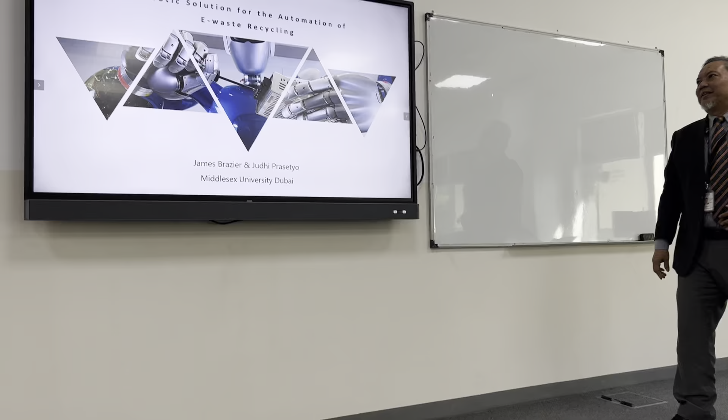So it seems that another presenter presented earlier, so I have to present last.

I'm presenting on behalf of James, who is a recent graduate of MSc Robotics. He couldn't be here. He's working as operation director for a manufacturing company in Dubai, but his interest is in robotics, just like my other students and graduates. They already have MBAs, but they take MSc Robotics anyway. So thank you for joining us.

All right, so the challenge here is that we have more than 57 million metric tons of e-waste in 2021 alone. And that's about as heavy or even more than the Great Wall of China. It's very big, right? And it doesn't stop there. By 2030, we will have 30 billion IoT devices. This morning we heard the keynote speakers talk about IoT devices, not only your phones, but all of these connected things, all these electronics will contribute to this landfill.

So why do we have so much e-waste? Well, first is because there's rapid R&D. When was the last time you upgraded your phone? It's probably less than 3 years ago, right? It's very rapid compared to before, when our devices could last for 5 years, 10 years. Now it's very, very quick.

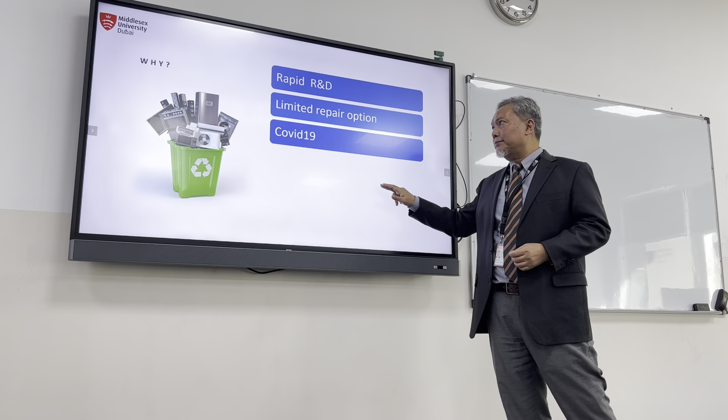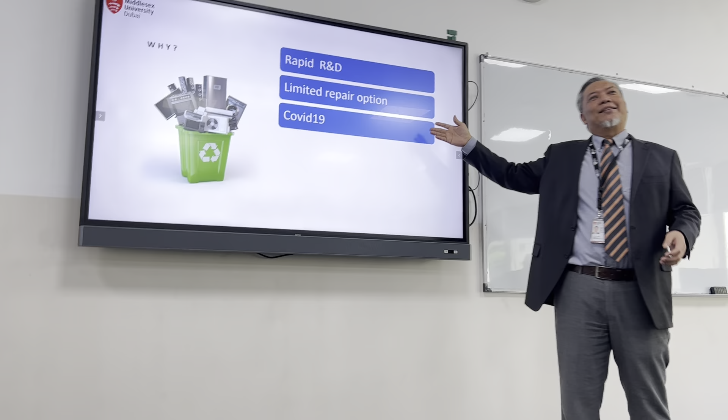And then COVID-19. Can you guess why COVID-19 is accelerating the pileup of e-waste? Because during the pandemic, we have online learning, we have work from home, right? So naturally, you need more devices. You want to upgrade your internet speed. Maybe you were happy with 100 Mbps, now you want half a GB or 1 GB, right? Maybe you used to have a 3G phone and were very happy, then suddenly you want 4G, 5G. So these things accelerate the number of electronics that we acquire, hence more e-waste.

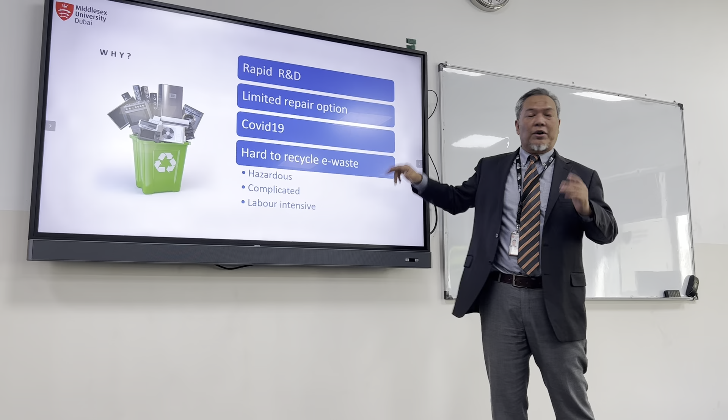Another thing is e-waste is really hard to recycle. While all these three things are beyond our control, what we are trying to focus on here is how to recycle e-waste, and how hard it actually is. Well, first it's hazardous because it probably contains batteries. Batteries contain mercury. Some e-waste can emit gases that are dangerous for us.

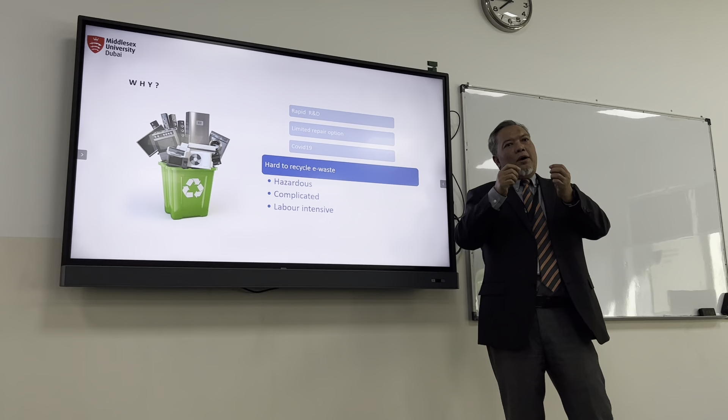It's complicated because most of them consist of small parts, small devices. You have to tear them apart and then you have to separate them. You have to put plastics over here, metal over here, and other things. Maybe some of them are recyclable, some of them are not, right? So it's very labor intensive. It has to be done by humans.

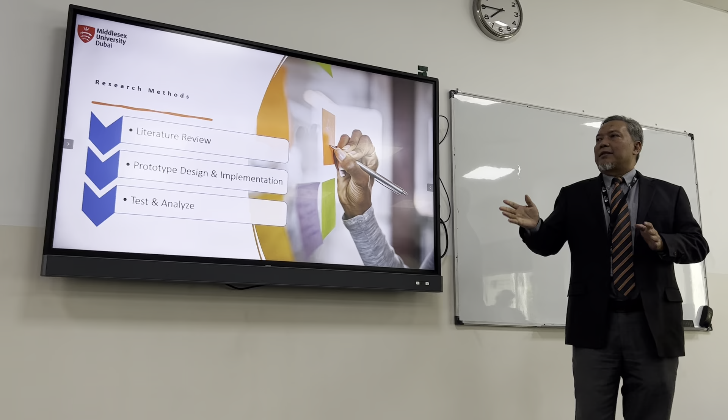That gets us thinking, how well can a robot help automate this process? Will a robot help us or not? If so, how well? So we did the research. Actually, this was James' final year project in MSc Robotics, and then we did further research on this.

We started with the literature review. We found that yes, there are many attempts at using robots for automating e-waste. So we started to do prototype design and implementation, and then test and analyze. During the literature review, we found that most failed attempts are because the robot cannot locate where the component is. It goes to the wrong things and then it stops the sequence.

Another hard thing to do with robotics is to have a generalized approach. Just like a human, if I give you radio model A, you will be able to tear it apart, and next time I give you another model, you will be able to tear it apart. A robot doesn't work that way. That's what the literature claims, but we have yet to prove that.

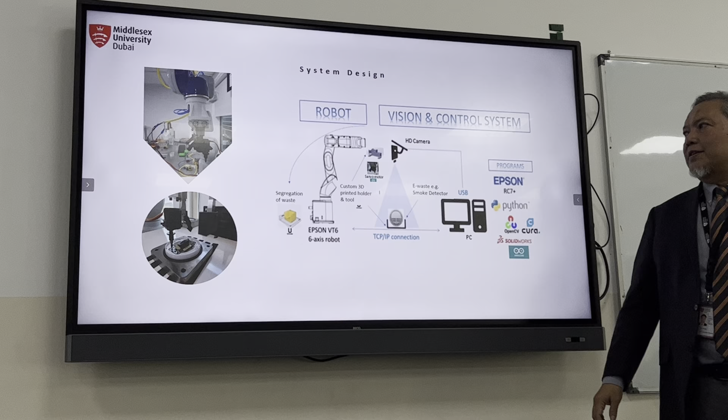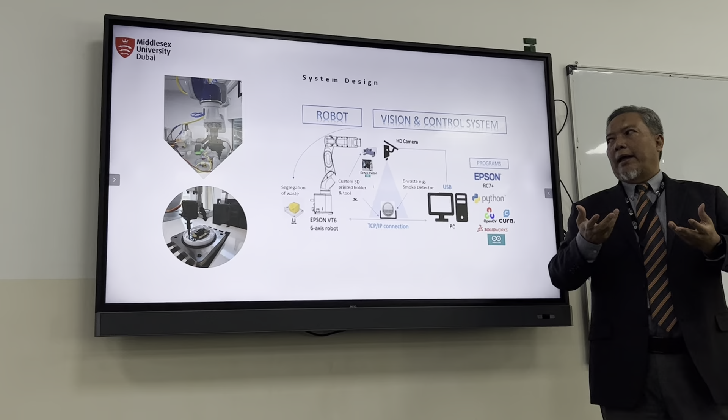So we built a system like this. We have an industrial robot in the lab. It's an Epson VT6 6-axis robot, and we equipped it with a full HD camera, and we picked an e-waste item as an example to be disassembled, and we will measure how much time it takes and how accurate it is.

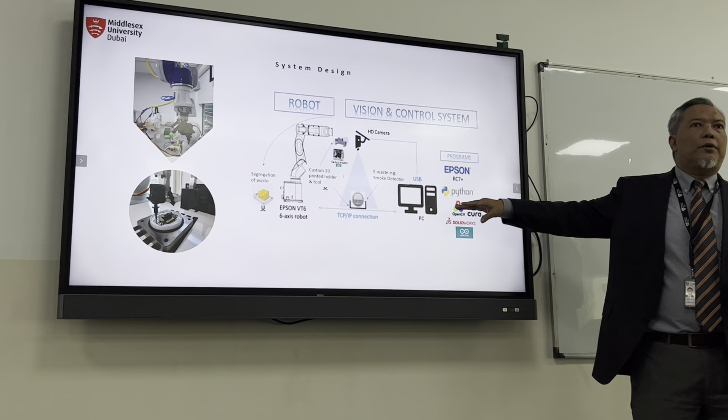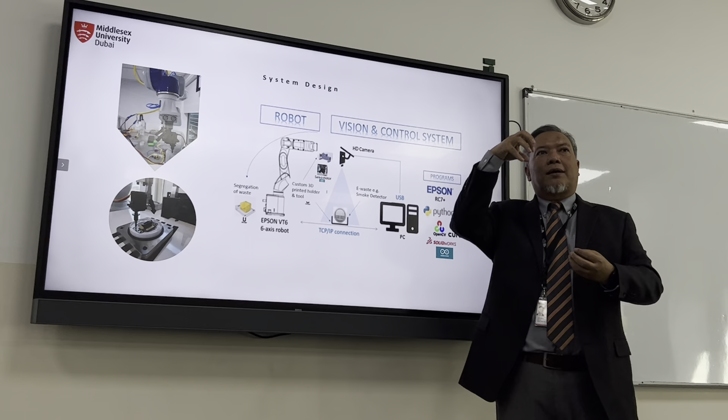And we take a smoke detector as a test subject, connected to a computer using Python and OpenCV, and we have to design a custom gripper to handle this e-waste. The custom gripper needs to have a screwdriver also there. We fit in a motor there.

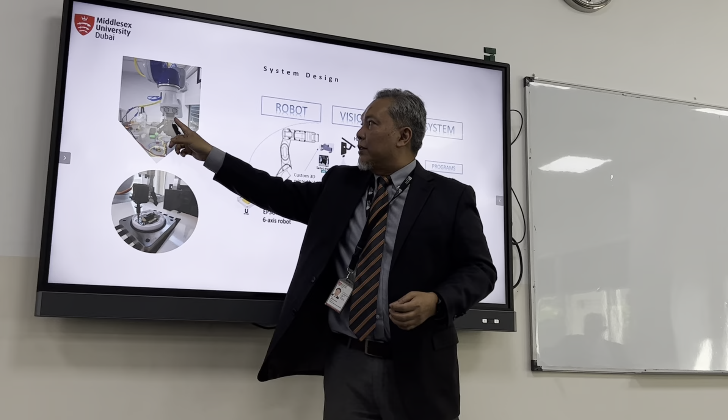So we have to design the gripper using SolidWorks and Cura, and we attach it on the robot's arm as the end-of-arm tool over there. Yeah, so it can open a screw because it has a screwdriver. It has claws that will pick the item and place it where it should be.

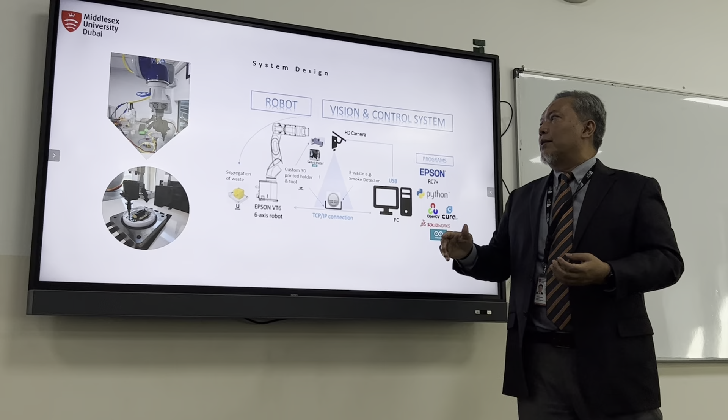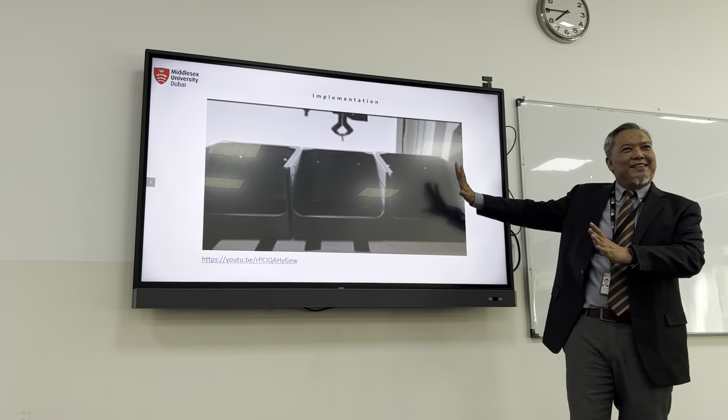So with this, we did the implementation, and let's watch. Does it work? Okay. So basically, what the video shows, it's a robot. Oh, okay, there it is. Okay. Let's take a look.

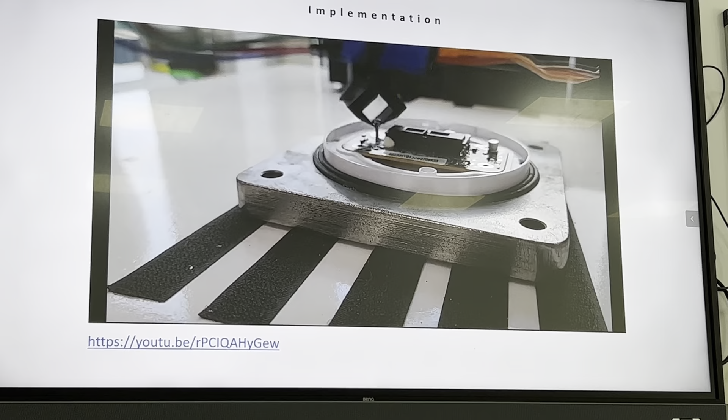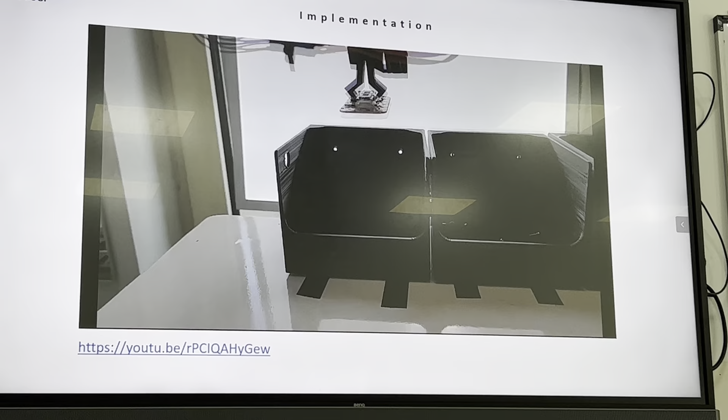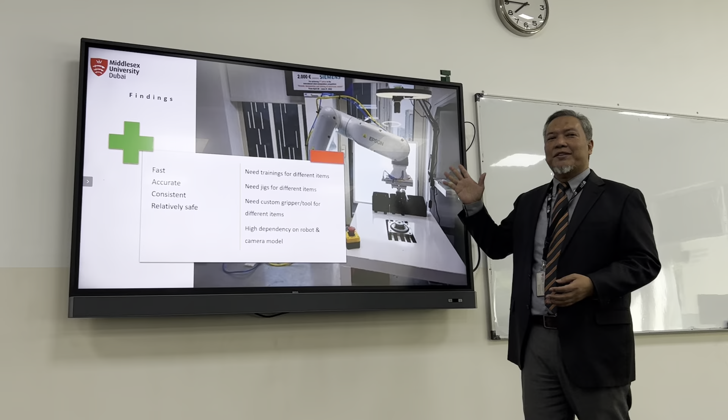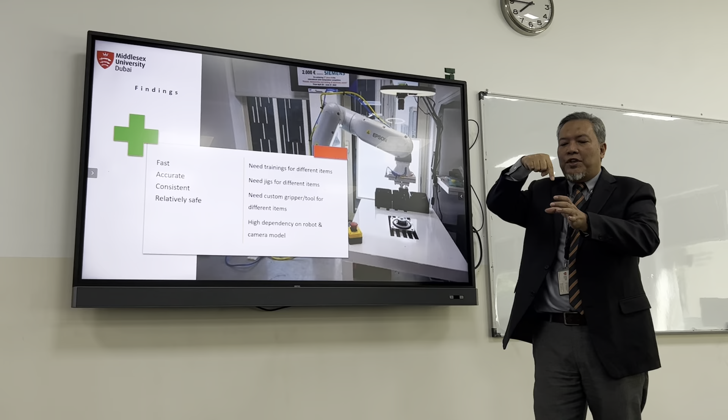Alright, so as you can see, the robot performs very well. And on the other hand, we also see that there are some issues that we have not been able to solve. So for example, it's fast, yes, it is accurate. And its accuracy is amazing because we don't have to place the e-waste in a certain way so the screw is always there, because there's a camera that, even if you put it like this, will know where the screw is, so the screwdriver will go exactly where it is.

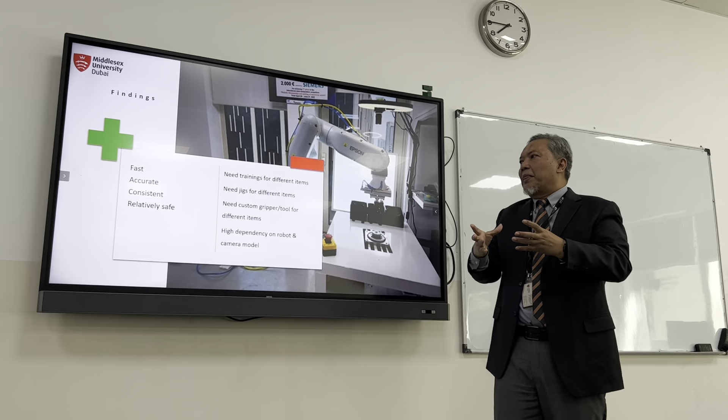It's pretty accurate. However, if you take another model of a smoke detector or other e-waste and you put it over there, you will have a problem. For example, you need another training because maybe it was plastic over here, but in another model it's metal. So after you pick it up, you have to put it in the place where it should be for metal, not for plastic.

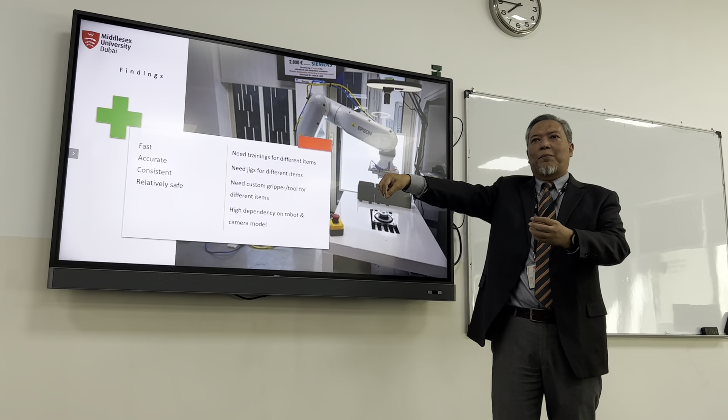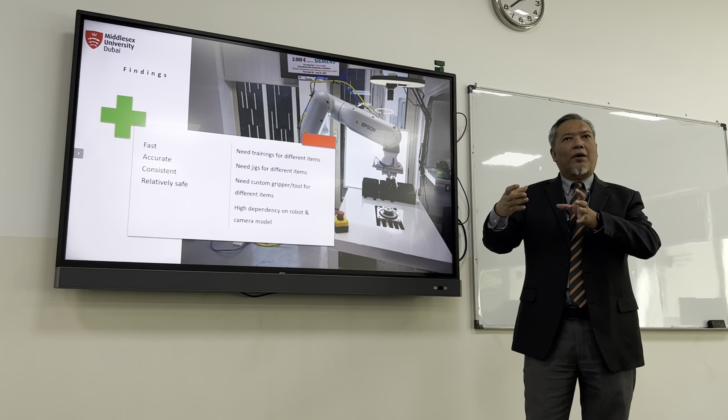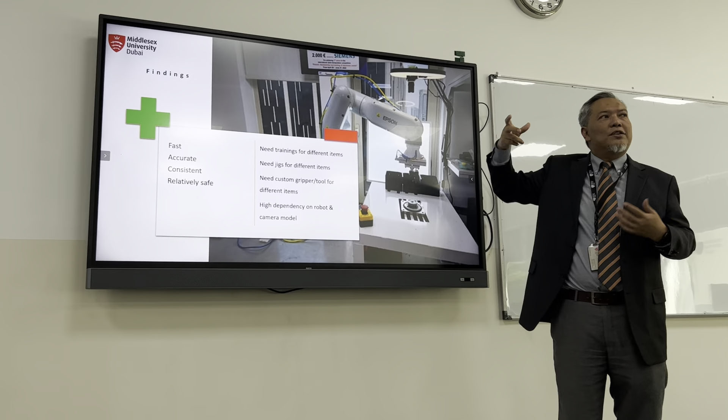And you need different jigs for different items. This jig here was developed specifically for this kind of e-waste. If you have an e-waste that is square or of different dimensions, you have to develop another one. It needs different custom gripper tools for different items. For this kind of e-waste, yes, this kind of tool is good, but for other e-waste maybe it's not useful because the e-waste is so big the claw cannot open wider, so we have to develop another one.

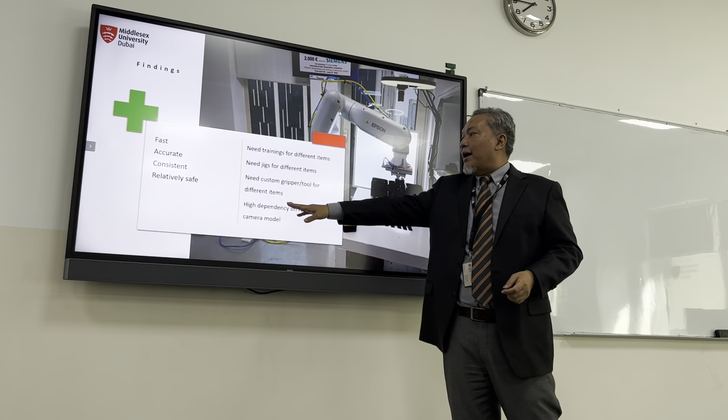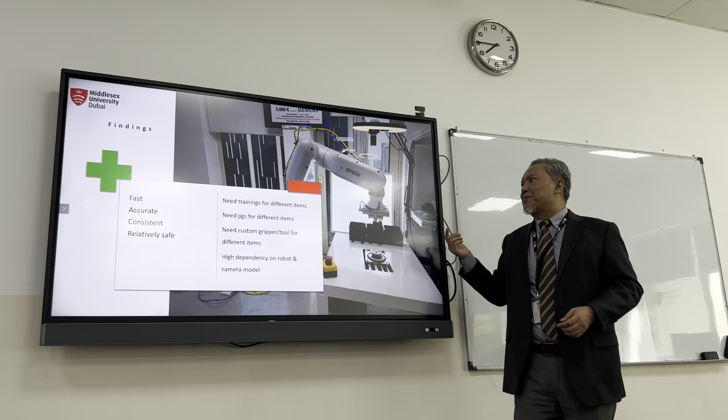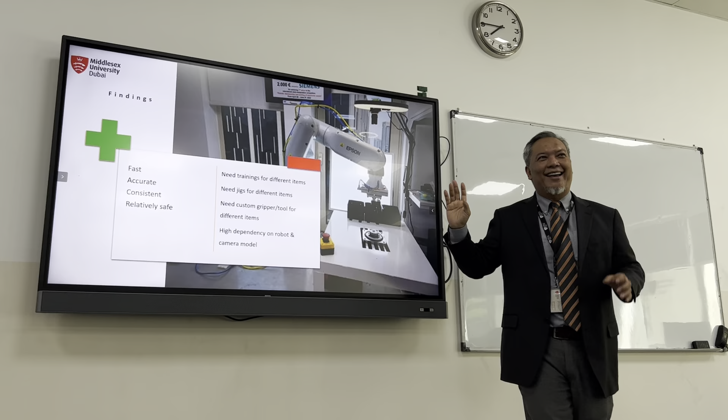And there's a high dependency on the robot and camera model. It so happens that we have a good enough robot. It's pretty good actually, repeatability and accuracy wise. And the camera is also very good, but sometimes it does misbehave under different lighting conditions. So during the experiment, if it's during the day, it works fine. In the evening, it works differently because the light is different. Maybe it casts shadows from here and there. So yeah, there's a high dependency here.

Otherwise, if we can control the environment, it's relatively fast, accurate, consistent, and safe for humans because then we don't have to deal directly with the e-waste. Hence, we have this conclusion. Yes, robots can help to automate e-waste recycling to be faster, more accurate, and safer for humans. However, there is still plenty of overhead effort needed to make it work, which is also not cheap. And probably some companies or some countries would still think it's cheaper to hire people to process this e-waste, or just not process it and dump it away.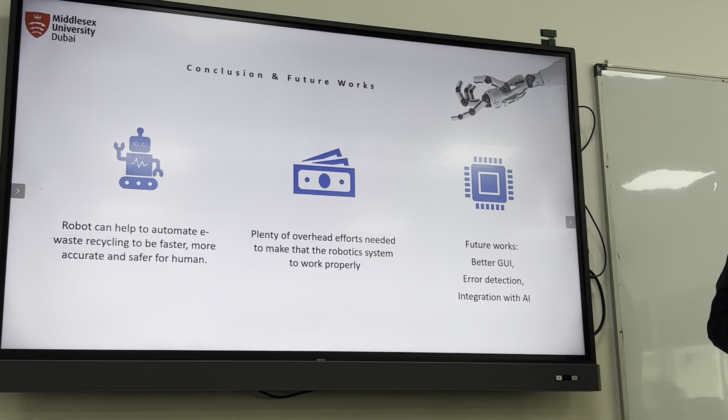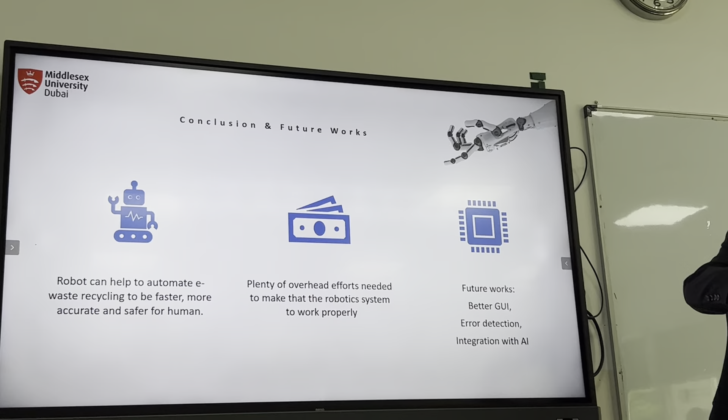Okay, but to solve that, probably in the future we will do similar work with a better GUI, with error detection. Because, for example, if the robot picks the item up and the item drops, the robot doesn't know. Currently, it doesn't know. So with error detection, it should be able to know that it dropped, look for it, and pick it up again. Currently, it doesn't have something like that.

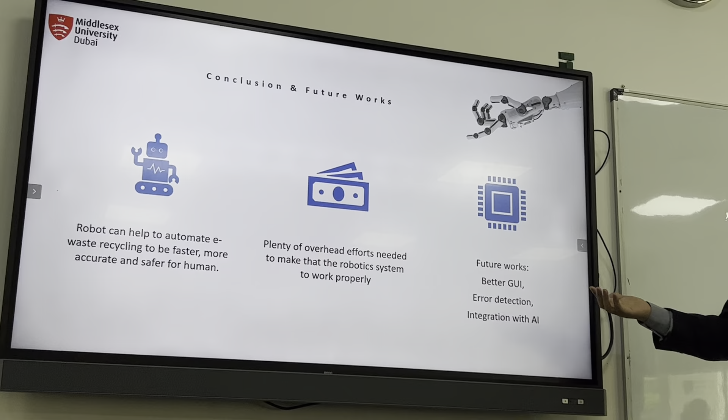And integration with artificial intelligence. Currently, it's not artificial intelligence, it's just simple object detection. With artificial intelligence, hopefully we can train the robot so it doesn't matter what kind of model this is. The robot should be able to adapt itself, for example, by changing the tools. If the item we place is bigger, it changes the tools automatically to a bigger gripper and so on.